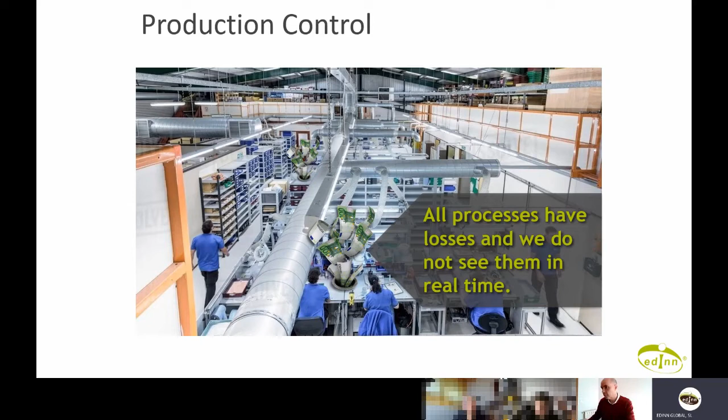So let's continue. Any question at any time. So I mentioned that there are 4 types of losses. You have to be able to explain these to potential users. This is very important because we have to be able to explain to potential users that all their work can only have 4 types of losses.

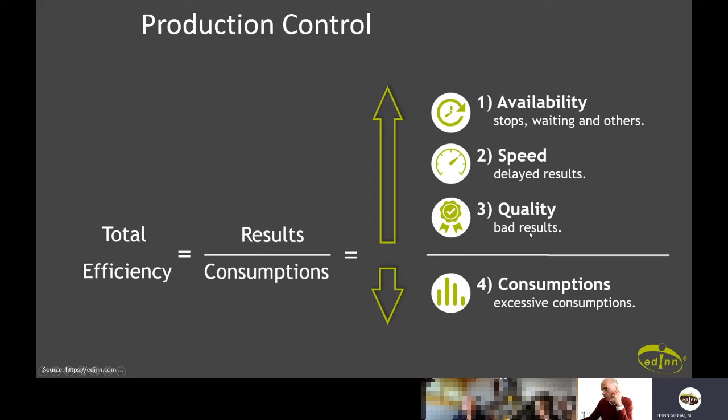Availability: it's not working all the time. Sometimes we do not work, we're stopped. Speed: sometimes when we work, we do not work at the speed we should. Quality: some of my results are not good, are discarded or reworked. And consumption, excessive consumption. Sometimes I'm consuming more energy, not more time, sorry, that would be availability. More energy or more resources in terms of spare materials or raw materials, things like that, okay?

So I guess you're familiar already with the OEE. You're familiar. Tomas, sorry, Marco, do you need any particular explanation on the OEE? No, it's clear? Okay, you're mute, Marco, you're mute. We cannot hear you.

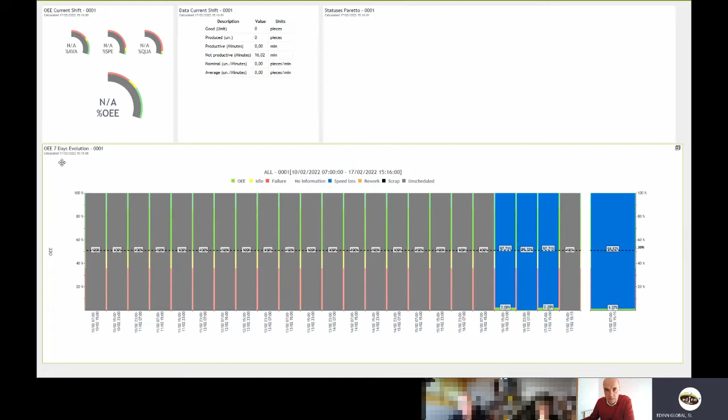Sorry for the microphone. No, I'm familiar because in our expertise we have two sides, Industry 4.0, but for 2 years now we've added lean management, and we also use OEE. And as you know, OEE is sometimes defined differently from company to company.

Exactly, and I'm very happy that you mentioned lean, because one of the good things of this platform that we've built is that it has been built over a very powerful theory, which has been developed by many people during decades, and I'm sure you agree with me, that's the superpower. The superpower is when you have the technology plus a very powerful theory. And believe me, one of the things that makes me happiest is when I go to a company and we are applying OEE and many more concepts and ideas, and then we are putting the technology, and that's changing the company.

That's changing the company. And by the way, maybe you don't know this, you are not just saving costs, producing faster and better, you are also saving CO2 generation. So we are also friendly with the environment, which is good. If we're going to talk top level OEE, because the people attending today already have a good knowledge of OEE, then let's go to the complex things of OEE.

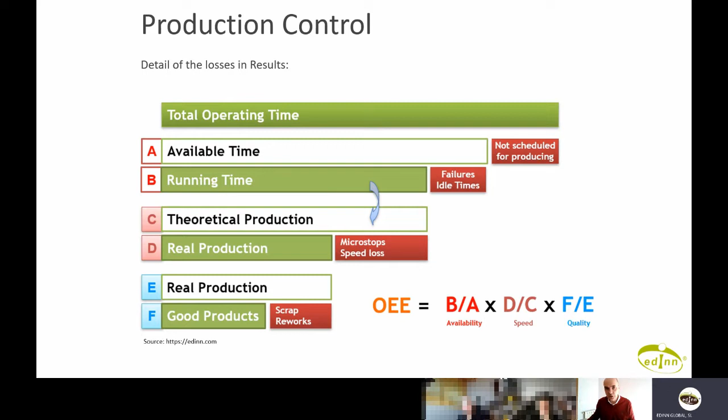So there are going to be little impacts on our day-to-day work, but there's going to be a very big impact, I guess, in 2, 3, 4, 5 years. I don't know exactly when, because you never know. This happens. One day you realize that you already have all these users doing all these things.

The current version is already doing some things, but they are not artificial intelligence. The current version is, for example, cheering you up and telling you, you did very well, you're improving, keep doing that. We could say that that's artificial intelligence, but internally it's not, so we do not say that. But we have, for example, artificial intelligence for failure prediction. That's real artificial intelligence. But as I mentioned, we're working hard to incorporate many more things with artificial intelligence.

And also very important, the data provided manually by the operators is also very valuable, as you probably know. So that's, again, the flow of data and information and how you control it, this virtuous cycle that I was mentioning before.

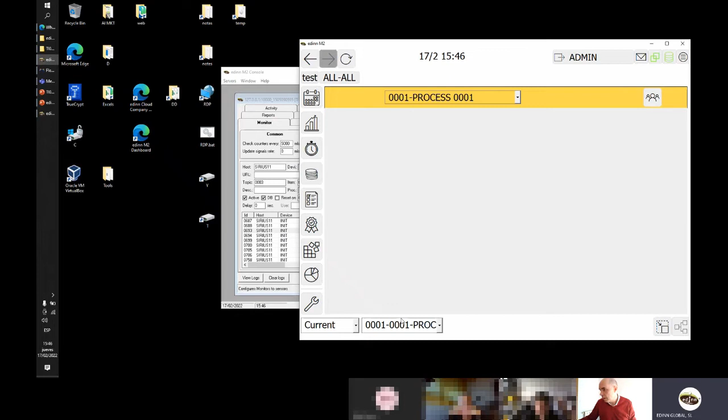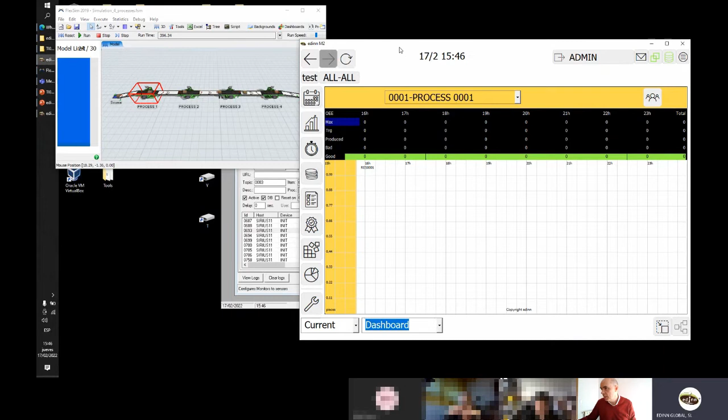Some clients say, I want to have the path together with other data. For example, we have here an hourly dashboard, which tells me the production per hour, how many were bad, how many were produced. I'm gonna start my factory already, so that we begin gathering data, so that we begin generating some data. You can have this in your computer also.

And there is a video. Maybe you don't know this. Maybe Thomas, you might be interested eventually to have in your own laptop the FlexSim simulator. There is a video which explains how to do this. So you can have FlexSim. FlexSim is free, this version, and with this demo that I'm showing here, all this that you see can be free, because you can have a community version with one process for edinn, and this version 2019 that I have here.

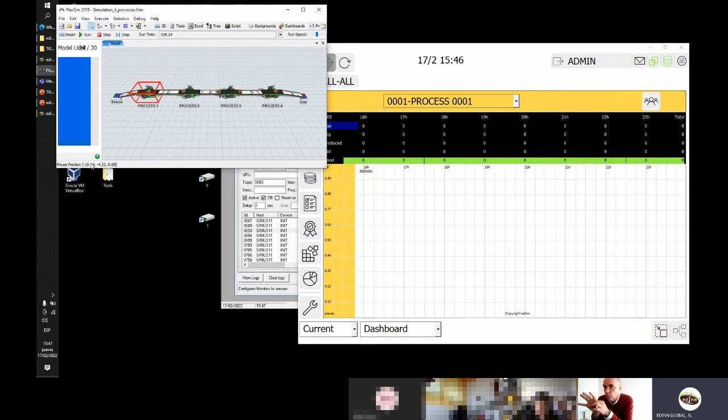I don't know if FlexSim has changed. I don't think they have changed their offer on this, and I got it free just by registering. So I guess it's still free, so you can have this for your own demo and to try many things and to show potential users what they can do with the edinn platform.

So let us continue with the content of the meeting. Then it's important to know the concept of area. Area is a group of processes, okay? And it's also a very powerful idea, because it allows us to create groups of processes for many things. For example, some people want to see their production line as a group of processes. Okay. Some people want to see the whole factory as an area.

Some people want to see, for example, all the machines that are from the same technology. For example, if I have many machines and I want to monitor packagers, and I have packagers in different plants, then I can create an area which is called packagers, and I have all the machinery which are packagers on that area. So area is powerful because we did it so that every user can have their own areas. Each user can see different areas. I can have areas that someone does not see, okay? So the concept of area is very powerful.

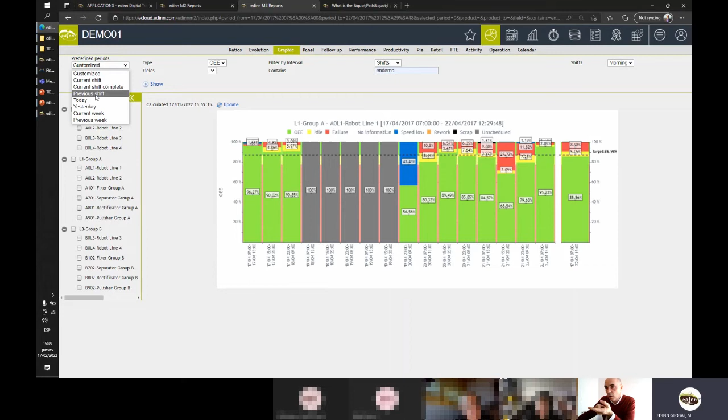Area is when I am, for example, taking a look at reports. Area is what you have here on the left. This group that you see here, group 3, it's an area. And many reports support areas. So I can say, I want to know what happened yesterday in terms of ratios for this robot, or I want to see 2 robots, or I want to see the whole area. If I click the whole group, then I just have one line. That's very good to have only one line because I'm seeing how it behaves as a group.

It could be a plant, and this can be multi-level. We have clients with many levels here, okay? So I could say, I want to see the OEE of my whole company, having 3 plants below that whole company area, okay? That's very powerful, to be able to mix different areas. Just by clicking the area, I have the report. That's nice.

And I can click on it if they are interactive. So if I click on it, it will show me the processes which form that area. And I can click further, by the way. Typically, you can drill down until the highest detail.

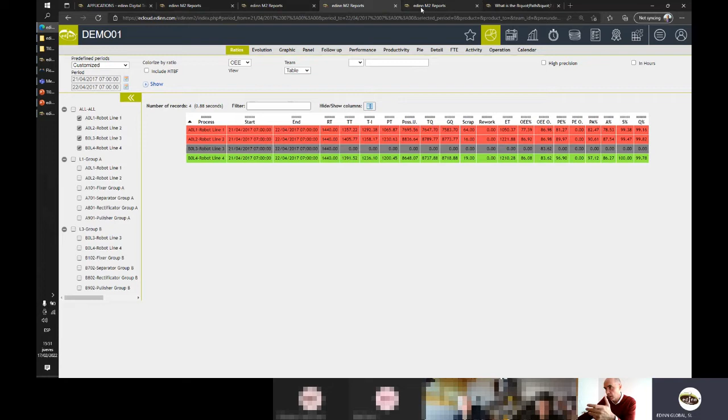Okay, I hope you saw how I did this, which is I was seeing the area, I clicked on it, then it brought me to the robots which belong to that area, which compose that area, and then I clicked on a robot and I saw the detail of that. Any question, please go ahead at any time, as you know.

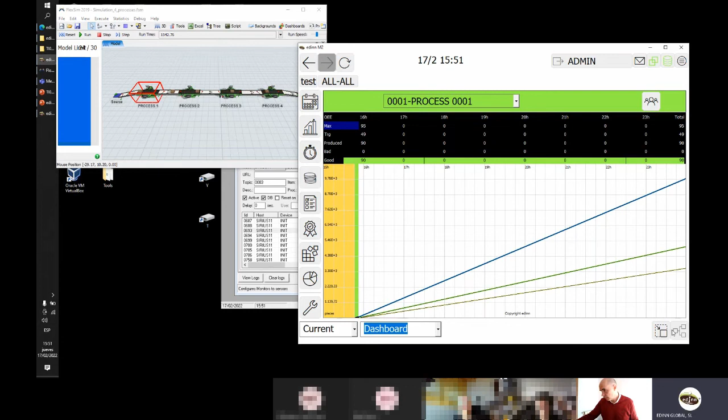And then it's also important to know the concept of status. Status is what can happen to a process. For example, here, if I make this a little bit smaller, then I see the button status here, which is something very nice from the edinn terminal, is that it's pretty easy to use, to understand. Our users tell us that one operator can train another one in an hour, more or less. So it's pretty easy to use.

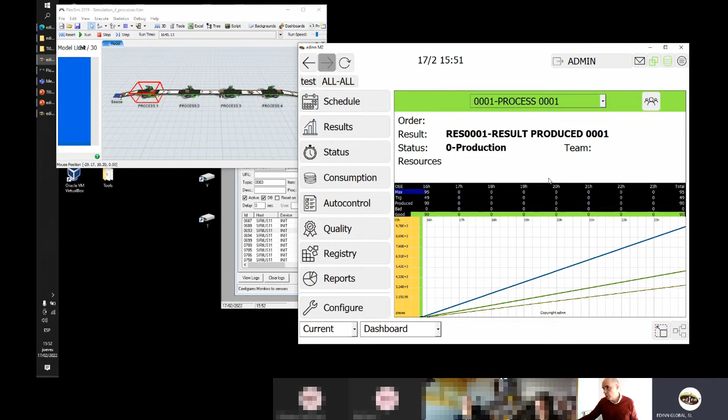So if I have a process here and I click status, then I see what's going on to the process, what has been going on to the process. Now it is working. I'm going to create a failure here. Let me show you. I'm going to have a perspective of the 4 processes, and I'm going to create a failure on the process 3.

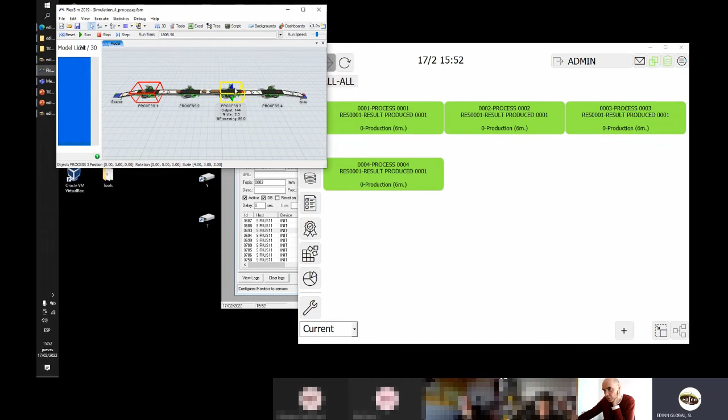How do I create failures on FlexSim? I say that it takes a huge amount of time to process. Now, as you can see, the parts are being stuck there because process 3 cannot process them. It will take a lot of time to process one part. So this behaves exactly as a failure on process 3.

And now the edinn is not detecting it in real time because it has to determine if it is a micro stop or if it's a complete failure. It is now calculating that. If we went to the logs of the server, let me open this connection again.

If we went to the logs of the server, you could see in real time, if you have a little knowledge on how to interpret this, how the edinn server is now doing all the calculations to determine in which state is, for example, the process 2. It is calculating, waiting, dumping, it's doing many, many things. This might seem simple, but it is very complex indeed to determine with precision of seconds which was the process that caused the failure to the whole line.

Now the whole production line is stopped because there's one process which is stopped, which is the third one. And now you can see that the other three processes are in orange color, which means that they are stopped because they depend on another process. Okay, I guess you're familiar with this already. So let's continue with other subjects.

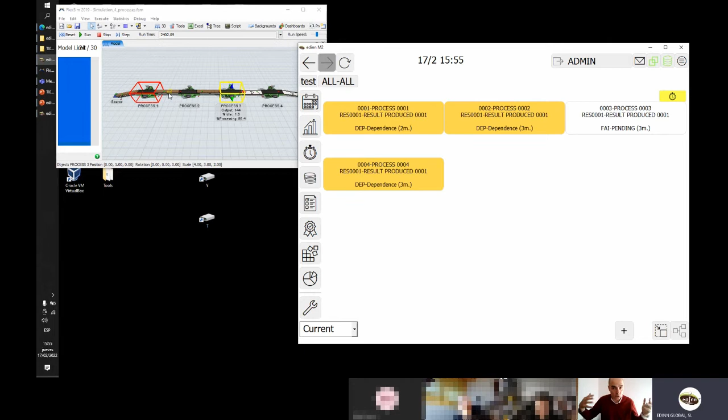Okay. So now we have here an exercise which might give us a better view of how the edinn works and also how OEE works. Before we start with that exercise, which is the last part of our meeting, I'm open to questions now. We can also solve questions after or in the middle of the exercise. But maybe now you have some questions, or you want to see any particular functionality on the system. Any questions so far?

I'm all good here. I think it's been all good so far. Great. Tony, Eyad, any question? No, everything seems pretty clear. Thank you. Actually, I joined late.

Hi everyone. I would like to ask about MTBF and MTTR, how the system will calculate this. And if it's already explained in the video, maybe I can watch the video later on. Okay.

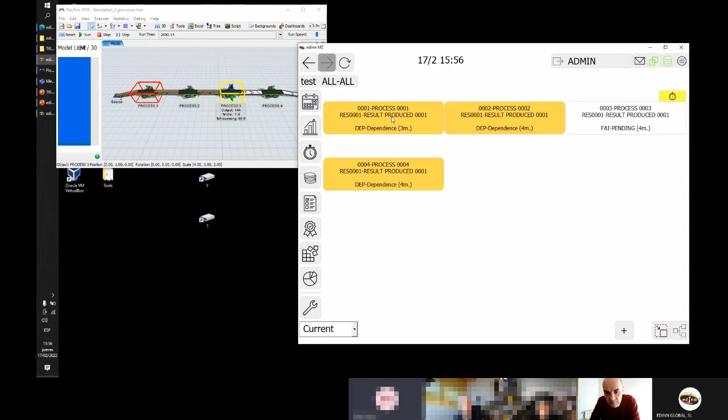So your question was how you can collect the data to calculate the MTBF and MTTR. Okay, great. Sorry. Actually, because we know that there are two different types of MTBF and MTTR: something related to maintenance, which is failure at the machine, and something related to operation, which is a process failure.

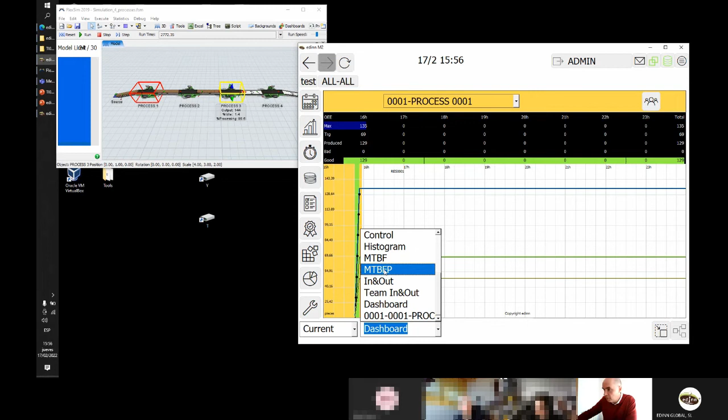Okay. MTBF and MTTR are shown when you click on a process, and here you have MTBF and MTBFP. I don't have failures now because this is a demo and I don't have enough data. If this was a real installation, you would have here a summary of all the failures that have occurred in a certain period. Which period can be indicated here on the server. When you go to calculations, here you can say limit period to, and you say the minutes. In this case it is 1 week. 10,080 minutes is 1 week.

So here, if I was playing with this factory for a while, it shows you every status which is failure, then the quantity of times that it occurred in the last week, and the minutes of MTBF, which is every how many minutes on average it happened in the last week. So for example, electrical failure happened 5 times in the last week, and MTBF is 2 days. So every 2 days we're having an electrical failure. And then MTTR would say, imagine 90 minutes, which means that if you do an average of the 5, it took 90 minutes per failure to come back to production.

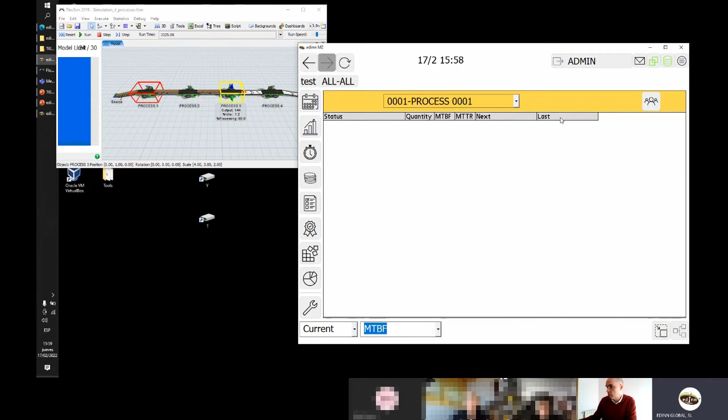So that's one place that you have MTBF. And then in many other ratios, many other reports, you can have MTBF. For example, I can say I want to see on the current week how the robot line went, and I want to see MTBF also. And it will add the MTBF, MTTR, and MTBF quantity columns to the ratios report. It might take a little bit longer, but there you have that information, which here doesn't tell me which failure it is. It just tells me that every 64 minutes on average, I had a failure on this robot.

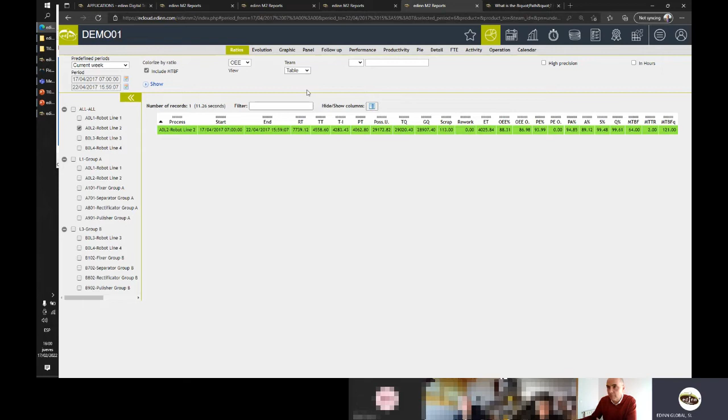Okay, and it took me only 2 minutes. That's very fast for these guys. Only 2 minutes to solve on average. So some failures might be maybe 10 minutes, some others might be 1 minute, but the average is this. And this happened 121 times, which is a lot. Okay. There are other places that you can see MTBF, MTTR. So any more questions? Eyad?

Yes, it's great. Actually, we are facing one issue with our customer. He said, I don't need to include the short stops, which are the stops below 5 minutes, in my MTBF and MTTR. So he needs to capture the failure. Yeah, or the micro stop below 5 minutes. Okay, I think micro stops should appear there, don't they? I'm asking because maybe you already tested this. In my thought, micro stops appear on that table and are considered there because they are considered as a failure, a little failure, but it's a failure.

Actually, we were not understanding the numbers there. But now when you explain the period or the duration in the server, it makes sense for us. So maybe we need to come back to our data and look for it again. Okay. And I will come back to you if I have a challenge here. Okay.

Something very important that we are not seeing in this meeting is how you manage a project, the steps, the methodology. Marco already asked about that. And I think Clara could organize another meeting specifically, because this meeting today is about production control, but not project realization. So if Marco or whoever of you has interest, please send an email to Clara and say, I would like to have a webinar where we focus on doing a project as real as possible. We can do that using FlexSim, as real as possible.

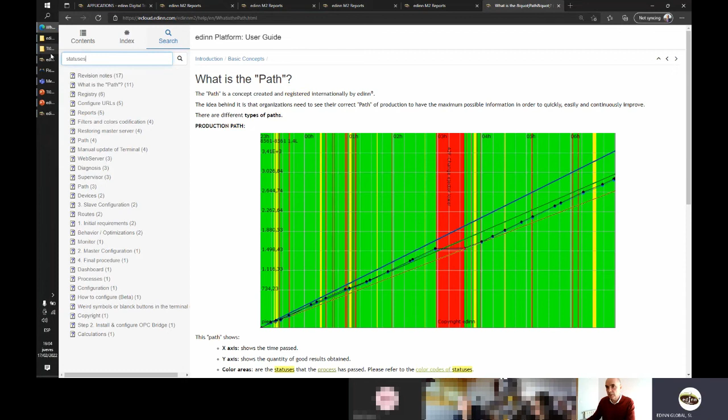It's important to go to the help and see what you have for statuses. Status. And here you will see, let me see where, status configuration. By configuring status, where are the types of statuses? What is a status here? If you go to a status, then you will see there are 5 types of statuses. Okay, so you have production, which is clear, working. Idle, it's shown in yellow. It means stopped, but it's not a failure. So the machine or the process is not broken.

It's just not working. Okay, so let me repeat. Idle is when the process is not broken, doesn't need any fix, any repair. It's just stopped because maybe it's cleaning, it's being adjusted, it's being, I don't know, checked, something that doesn't allow the process to produce, but it's not broken. Then we have dependence, which is the process is waiting for another process or another thing. Okay, what the exercise was saying, lack of raw material, is typically considered a dependence.

Okay, then we have failure, shown in red, which is the process is stopped because of a failure. The process is typically broken or needs some intervention for it to continue working. And then we have the 5th status, which is not scheduled to produce, which means that the process is not intended to produce. The company does not consider that time mandatory for the process to produce.

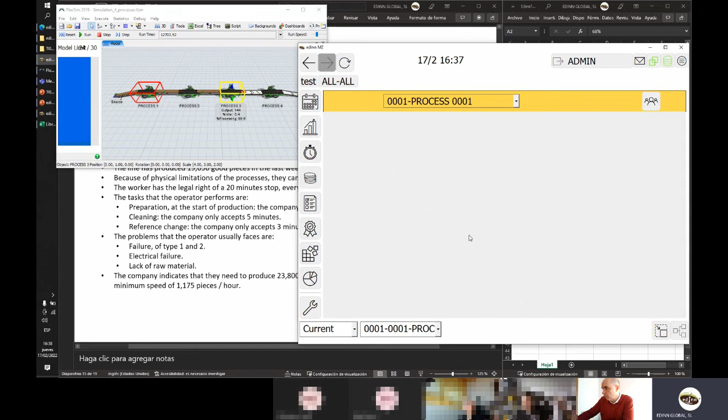And now I am open. I have here a FlexSim, a server, and I have a terminal, in case any one of you could have any additional question or thing you would like to take a look at or solve. For example, I guess you're familiar with this. You can have your own dashboards on the terminal. You can see this from your mobile phone. You can have this dashboard that I'm showing you. We can provide the source code of this dashboard to you.

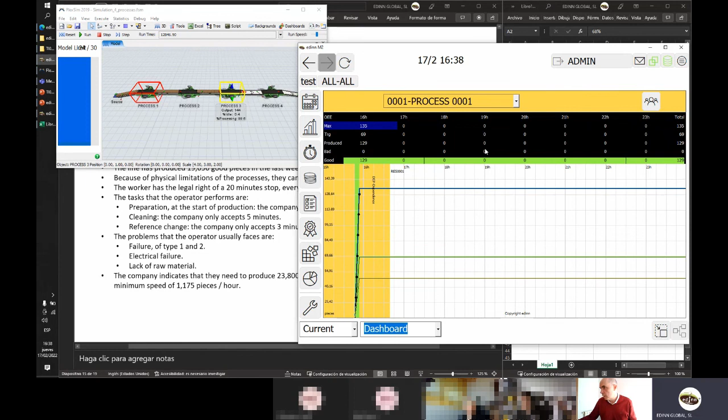If someone has experience programming with the API of edinn, or someone has a colleague in their company who can program, all these things here that I'm showing with the mouse can be completely customized for every client, because we can provide you this source code, as I mentioned. Let me solve this failure that I created here, so I can put the factory back to work, and having that, we can start maybe answering some questions or maybe finishing the meeting.

So questions, anyone could ask about what would be the next steps of edinn, where are we investing for the next version, when the next version is coming out. If you would like to do commercial activities, if you would like to cooperate with us already, Marco, we already talked with Marco about this in the beginning of the meeting, how we could boost the commercial activities in your areas. I'm open to whatever conversation you would like to have, or we can finish here and close the meeting. Any questions, comments?

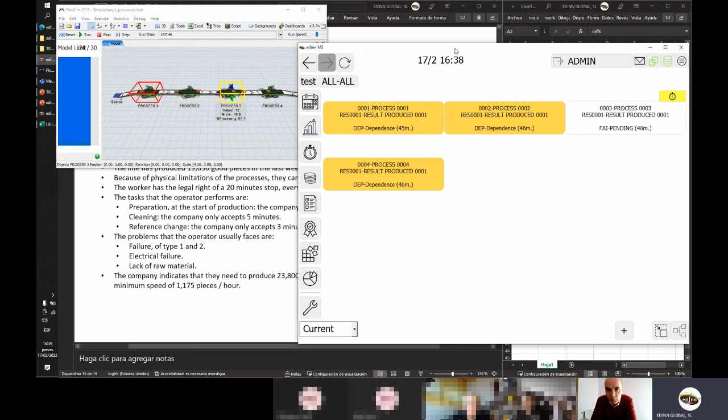No questions? Tony, Eyad? I think everything's pretty clear on my part, at least. Thomas? Yeah, it's all good for me here. Okay, you are a very experienced guy on edinn, and I don't know if I provided you much value, because many of these things you already knew. No, it was good to have a refresher, because I've not been hands-on with implementation for a while now, so it's good to have a refresher.

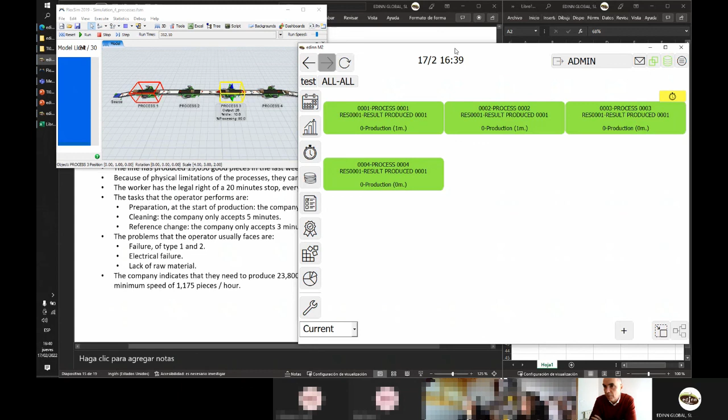We can do a webinar, because this was useful, the exercise and, as you mentioned, some of the reflections and ideas might be useful, but sometimes going step by step, creating a project from the beginning. Although there's nothing like a real project. So we can do that as a laboratory project, but there's nothing like a real project, because every client has different particularities that can come out, and we learn a lot. In fact, one learns by doing projects. Every project has a particularity that forces you to learn something special.